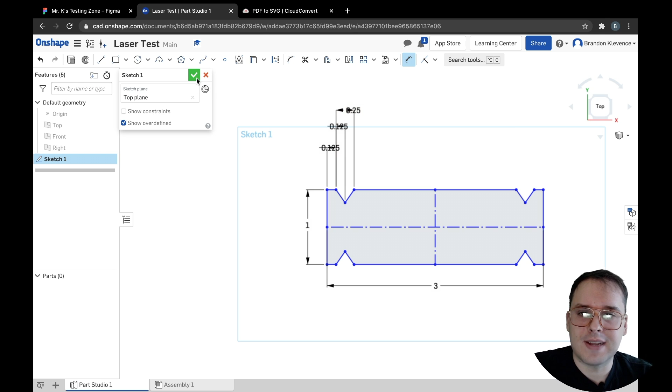What I want to show you right now is how to get something out of Onshape and into Figma. So I have a sketch that I've created. Now it could be you have a 3D object as well that you've made if you wanted to prototype it. So I could theoretically extrude this out and see what it looks like if it's a quarter inch thick or an eighth of an inch thick, to pretend like it's a sheet good on the laser.

What I'm going to show you is how to export this so that we can get it into Figma so that we could laser cut this shape. Now I've made something that's kind of like an easy ear saver for a mask. I put it behind my neck and put the straps of my mask on there.

What I'm going to do is it says I could export it as a DXF. I haven't always gotten good success with this, but you can try it if you want to. I'm going to actually create a drawing of this sketch and set it to no views right now. I'm not going to have a border, I'm not going to have a title block - those are super important steps. And I'm going to hit OK.

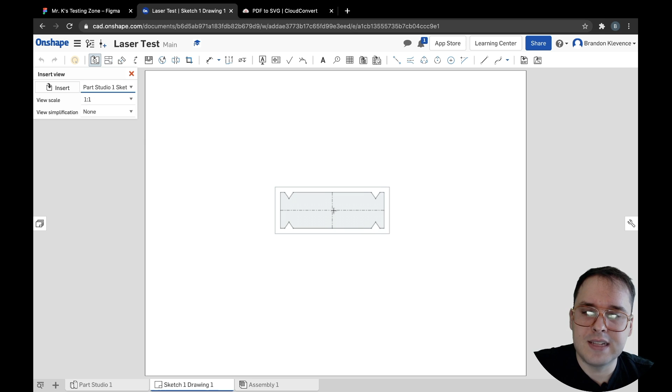Now it's going to start creating the drawing, generating that. And the first option it's going to give me is to draw the top view, hopefully. The biggest thing you need to make sure you have right here is that it's 1:1 scale, so I can insert this anywhere on the sheet. I'm just going to insert it right here for right now.

Once you have this drawing, I could remove my construction lines if I wanted to - I'm not going to do that right now. You can hit export, and once you hit export, you want to export as a PDF. I'm going to hit export, and it's going to start downloading something. Give that a moment to think.

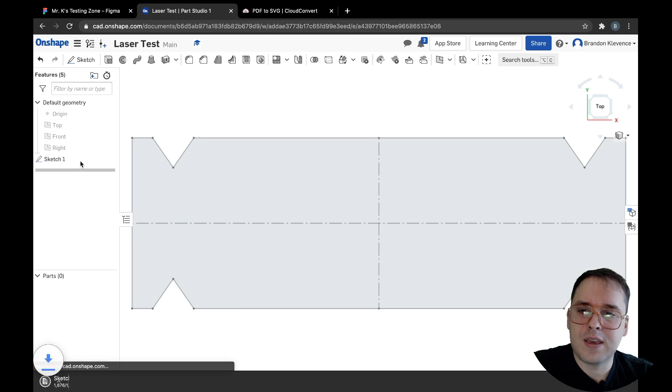What I want to note right here, right now, is that this rectangle that I've made is 1:3. Okay, so we're going to just remember that for a moment, 1:3. I already have some samples here because I was just making sure this works - again, I haven't used it since last year.

What you're going to do, you can go to any conversion website. I like this one right now because it seems to work, and I'm going to convert my PDF to an SVG. That's something that we can open up in Figma. So if I hit convert here, it's going to take a moment. There are other websites you can use, but this one works good for us.

I'm going to hit download. Now I've downloaded that thing, and I could have actually just left it there - I could have just dragged it up into here. The other thing you can do is file, and then place image, and then from my downloads I can choose this SVG.

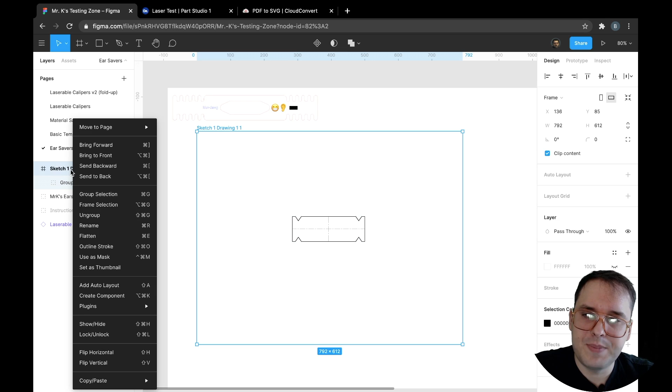Now once I place it, you'll see that it tells me the file - it's in its own little frame. I'm just going to go ahead and click on it and ungroup it. Now I should be able to ungroup this frame too, and then it's in there on its own.

You can go ahead and look underneath of it and see what lines you have. Again, I don't need these construction lines, so I can go ahead and delete them. This one - what's this one? Yeah, I do need them.

I can go ahead and select all of these. This is like one type of line that I'll be cutting out, and I can go ahead and set them to be laser cut and set my line weight to be 0.1, and now I have a file that's ready to be laser cut.

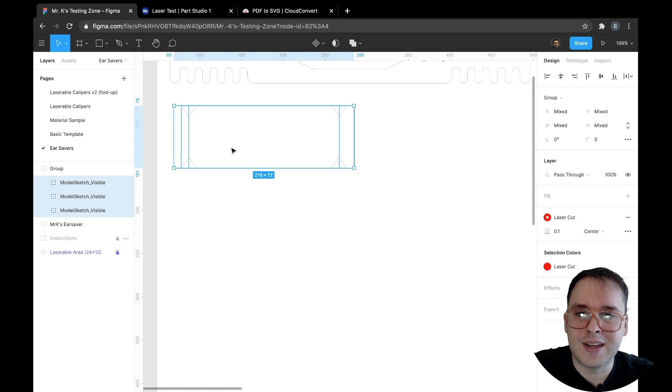So if you want to check and make sure that your sizing's correct, if I select my group up here - 72 height, so that's that one inch that I had before, and 216 width, that's actually 3 inches. So the height remained the same after the conversion and all that, which is most excellent.

So we'll be able to utilize Onshape if you need to design something in there - it's more comfortable for you to do that in there. And you can actually bring it into Figma, process it for the laser cutter, and then we can get it on the laser cutter in no time.

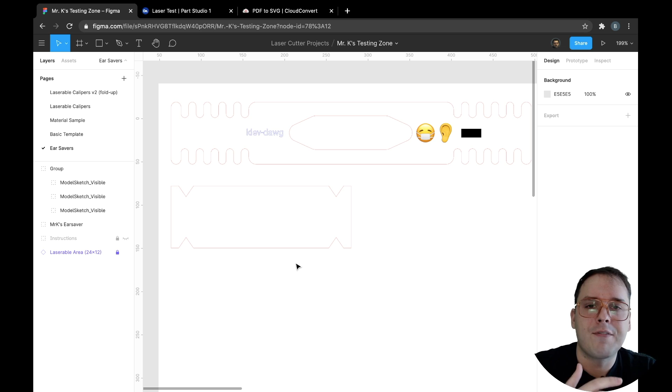So that's how to go from Onshape to Figma so that you can design something for the laser. Let me know if you need any help or have questions with it as we move forward. Take care.